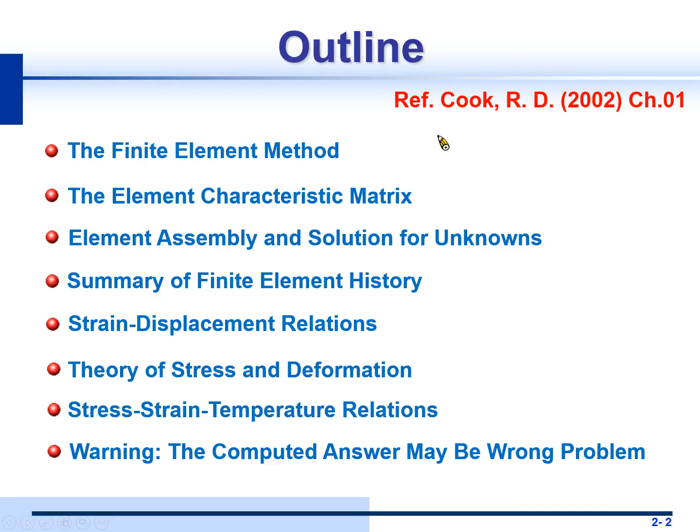So the lecture will introduce the subtopics, and all the subtopics are referenced by Cook RD, chapter 1.

Now we will introduce the finite element method. In this slide, we will show you what is a finite element method. The finite element method is a numerical procedure for analyzing structures and continuous media.

This method can be applied under this condition: when the problem is too complicated to be solved by the analytical solution. Analytical solutions are obtained from journal papers or textbooks.

Because all the analytical approaches have so many assumptions to simplify the problem, the problem after simplification, as compared with real conditions, is sometimes totally different.

So for actual engineering applications, this is not good when using the classical analytical method. Therefore, this is the reason why the finite element method is so important for industry and engineering applications. The problems in engineering, such as structural or stress analysis, heat conduction, or others, several other areas of problems.

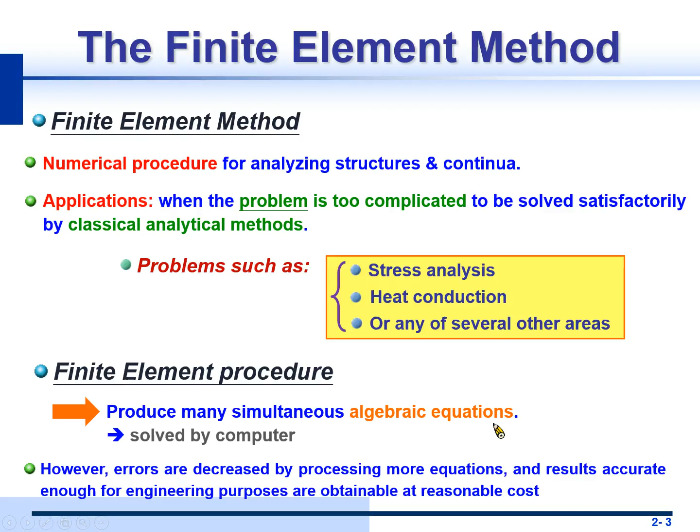Next slide, we'll talk about the origin of the finite element method.

The finite element method is originally dated as a method of stress analysis. So this approach comes from structural analysis.

First, the finite element method is also used to analyze problems such as heat transfer, fluid flow, electrical, and so many other fields.

The application of the finite element procedure includes the design of buildings, electrical motors, heat engines, ships, airframes, and spacecraft. So many industries and applications in life will use this method to calculate the structure or temperature or other concerns of analysis.

So next, I will talk about who will use the finite element method and the software.

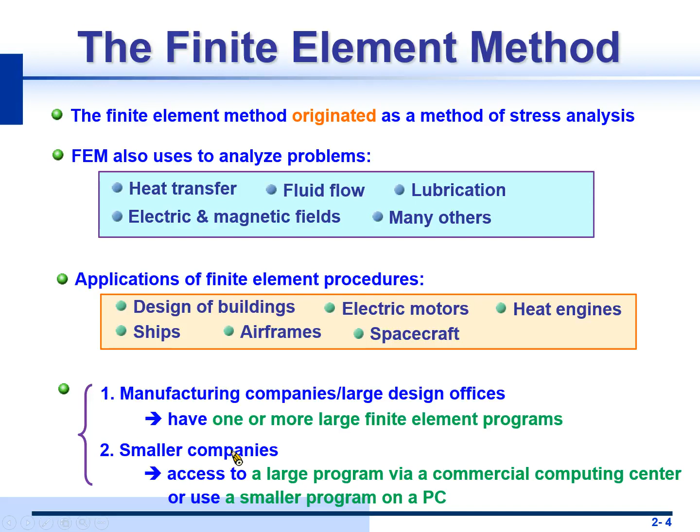OK, if no problem, we will move to the next slide. Next slide, we will talk about the basic finite element concept.

One end of the bar is fixed. The other end is applied by a force P, axial force P. The total length is L. You can imagine the displacement U on the right of the bar after applying the axial force.

So from the viewpoint of the classical approach, we need to write a differential equation for the bar. It means the displacement U is a function of x, and solve it to find U at location x, which is at L_T.

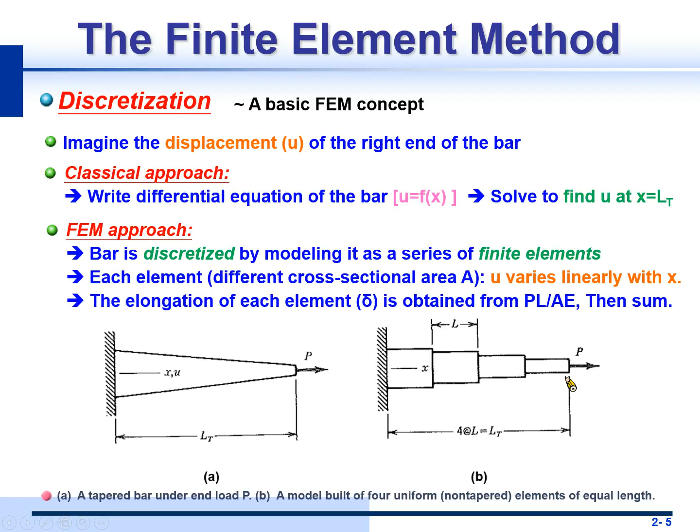If no problem, we will move to the next slide. This slide just shows you the basic finite element concept.

As we talked about in the previous slide, for this example, the accuracy of the solution can be improved as more elements are used, and the finite element models a structure as an assemblage of small parts - it means the elements, and each element has simple geometry.

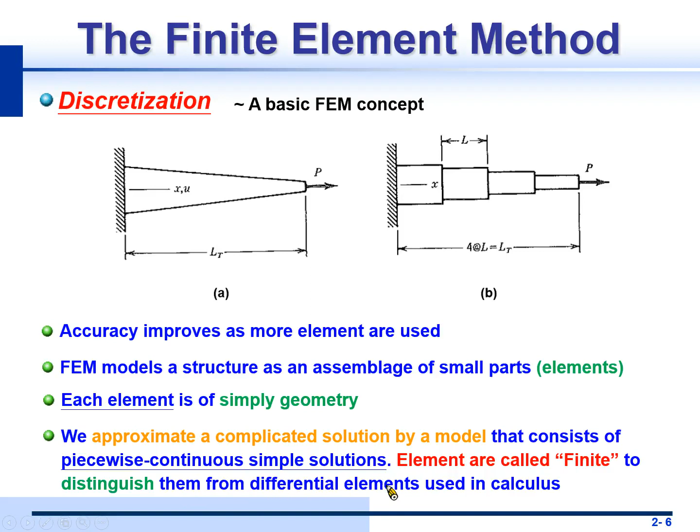And we can approximate a complicated solution by a model that consists of piecewise continuous simple solutions. The elements are called finite because we use numbers of elements, not infinite, to distinguish them from the differential element used in calculus.

Let us move to the next slide.

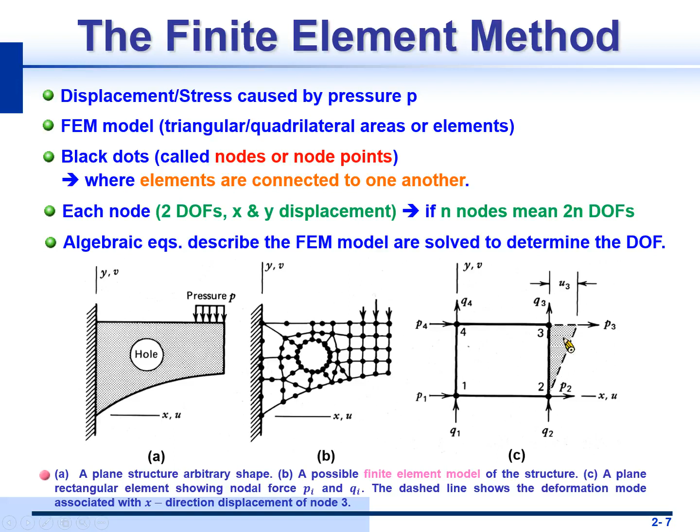This figure follows the previous slide. Let us reference these figures again. From figure A and figure B, you can see the distribution pressure P has converted to concentrated force. Again, the pressure P in the continuous structure becomes concentration force applied at these 3 nodes.

In addition, the elements must be restricted in their deformation pattern. For example, let us reference figure C. Elements are allowed to have only such deformation modes as will keep the edge straight. Adjacent elements will neither overlap nor separate. In other words, if adjacent elements occur in this situation, it means these two elements are separated or have a crack along this edge.

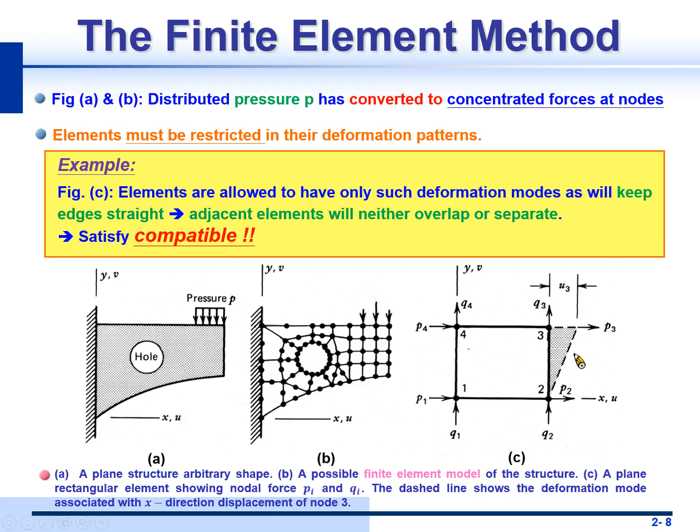Okay, let us move to the next slide.

When we use the finite element model to represent this structure, it typically yields a piecewise smooth phi. Within each element, phi is a smooth function represented by a simple polynomial.

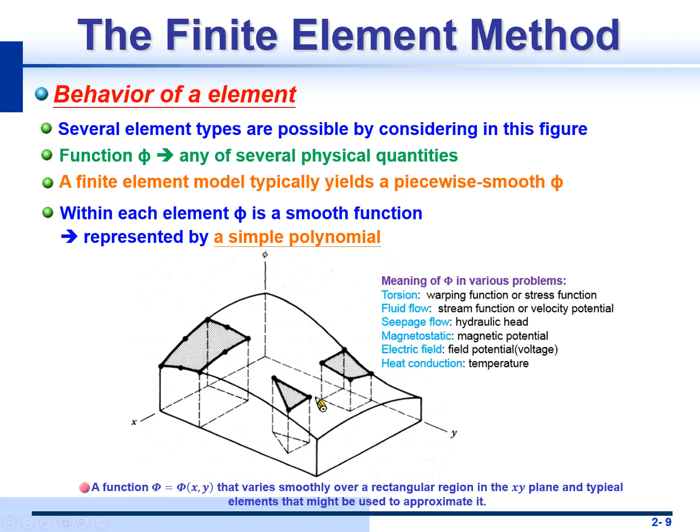I just said that depending on the element type, how we define the polynomial form will be different. The details will be explained later. Okay, let us move to the next slide.

For example, when we consider the triangular element, please reference this figure again. We use the linear polynomial phi equal to a1 plus a2x plus a3y, and the coefficients a1, a2, a3 are constant. What are the variables x and y? x, y is the location of the node. Sorry, for the node.

For the four-node quadrilateral element, we use the bilinear function. This is just one example; we have other definitions for this function. Phi equal to a1 plus a2x plus a3y plus a4xy. It should be noted the 8-node quadrilateral has 8 ai in its polynomial expression. This equation is just for the 4-node element.

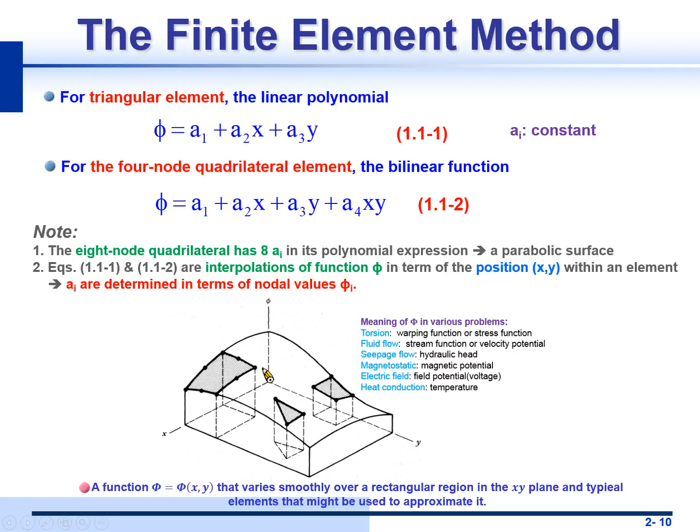We will move to the next slide. How to decide which element to use? The answer is not simple. First, we review again the definition of the finite element method. The finite element method is a method of piecewise approximation in which the approximating function phi is formed by connecting simple functions, each defined over a small region.

Here is the element: a finite element is a region in space in which a function phi is interpolated from nodal values of phi on the boundary of the region in such a way that the inter-element continuity of phi tends to be maintained in the assembled region. So the definition is very important. Combining this concept and the previous slide, I believe you know the basic concept of the finite element.

Following, I will list the steps of the finite element analysis. First, we need to divide the continuous structure into finite elements. Then formulate the properties of each element; it means we need to care about the conditions that allow deformation or temperature. Then assemble the elements to obtain the finite element model of the structure. This is from the viewpoint of structural analysis. And then apply the known loading.

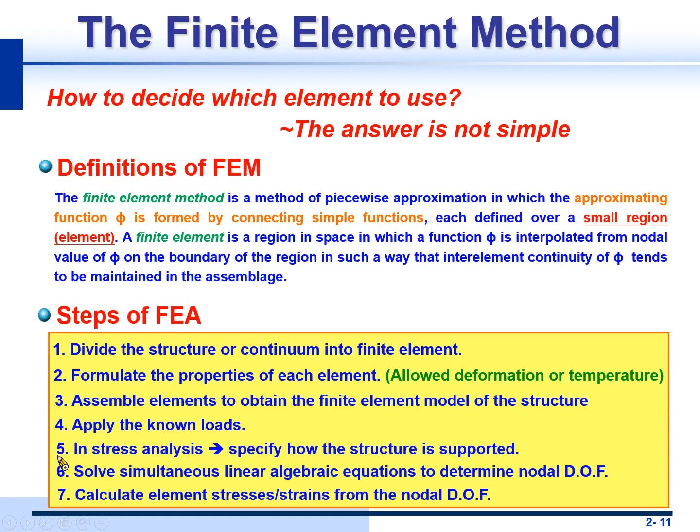This slide just shows you some example applications. This example is an axisymmetric rocket nozzle. The left side is the detailed structure of the rocket nozzle, and the right side is the possible mesh model. You can see that each element has a node at each vertex, and the stresses caused by the temperature gradient and the internal pressure are desired.

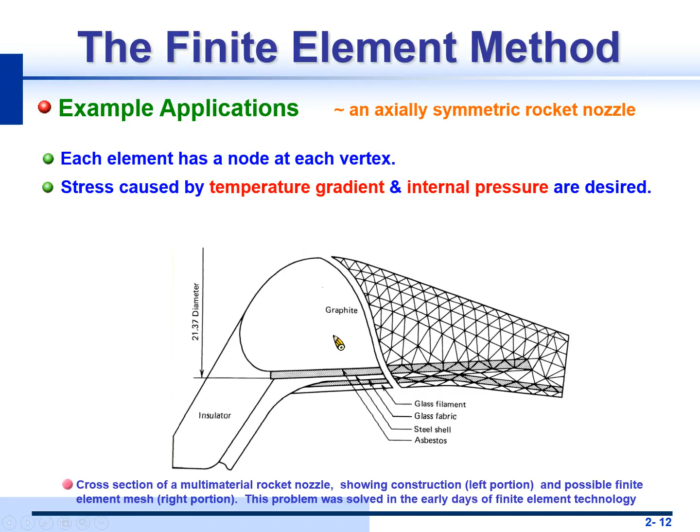The temperature gradient comes from the heat transfer analysis and needs to be input to the structural finite element analysis. And we will apply the internal pressure around the inner surface of the rocket nozzle. So if you want to get an accurate result, you need to carefully handle the boundary conditions and how to apply the loading based on the actual situation of the problem. This is very important when you handle such a problem.

Okay, in this example is an arch dam. You can reference this figure. When modeling the arch dam, we select 3 kinds of elements.

The first is the quadrilateral element, the second is the triangular element, and the third is the single cubic element. And you can find that in each kind of the finite element modeling, the elements that we talk about are different based on the location of the node.

So when you see the model, the first model uses the quadrilateral element. The element is based on the isoparametric solid element, and based on the loading condition, the stress is induced by the hydrostatic and the gravity loading.

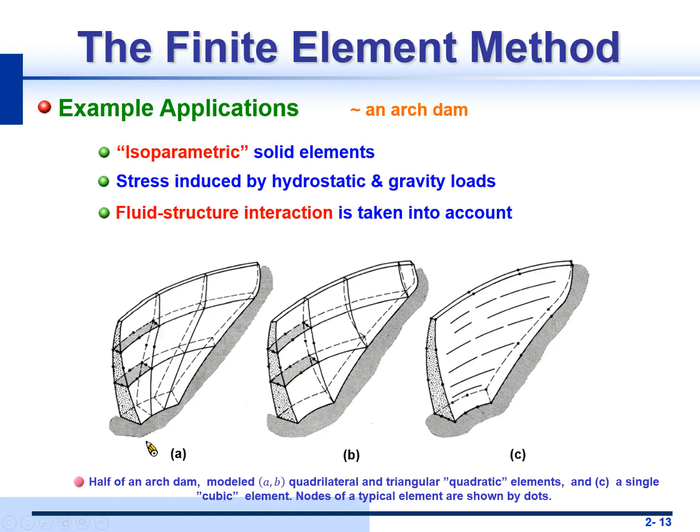Let us move to the next slide. Okay, in this example, we talk about the structural mechanics problem. In this case, it is the plate-bending element applied to an automobile frame. This figure shows the finite element model for this automobile frame. The detailed model is shown here.

It is used to find deformation, stress, natural frequency, and mode shape. So this finite element model is for the vibration analysis of the structure. We care about the deformation and the stress induced at the natural frequency. This is really important because the driver or people in the car need to feel comfortable, and we need to consider the structure and the stress of the car.

So this just gives you an example, and these three finite element contours from the left side to the right side are the bearing housing model, the deformed model, and the stress contour of the bearing housing. So this is easy to understand.

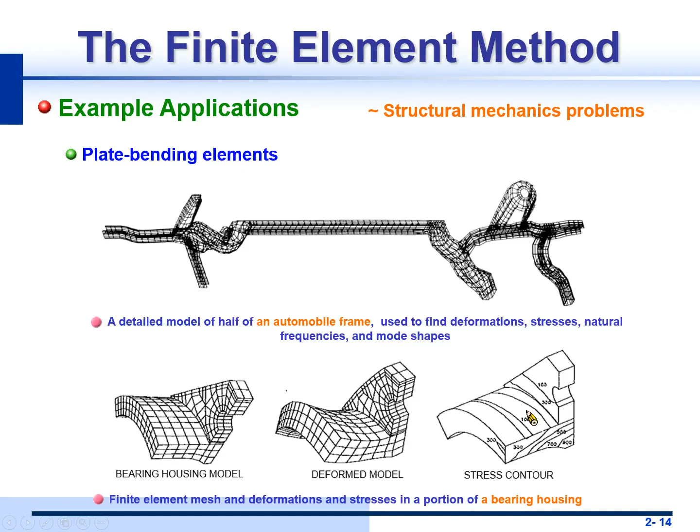Next slide talks about the element characteristic matrix. When we talk about the element characteristic matrix, we call it the stiffness matrix or conductivity matrix. When we perform the structural analysis, the matrix is the stiffness matrix. But when we perform the heat transfer analysis, we call it the conductivity matrix, based on the problem you

prefer. In addition, we have three ways to derive an element characteristic matrix. The first is the direct method. The direct method is limited to very simple elements, based on physical reasoning.

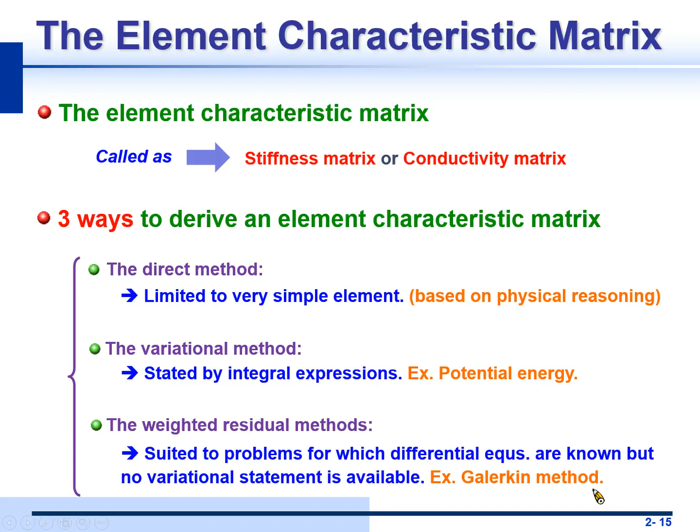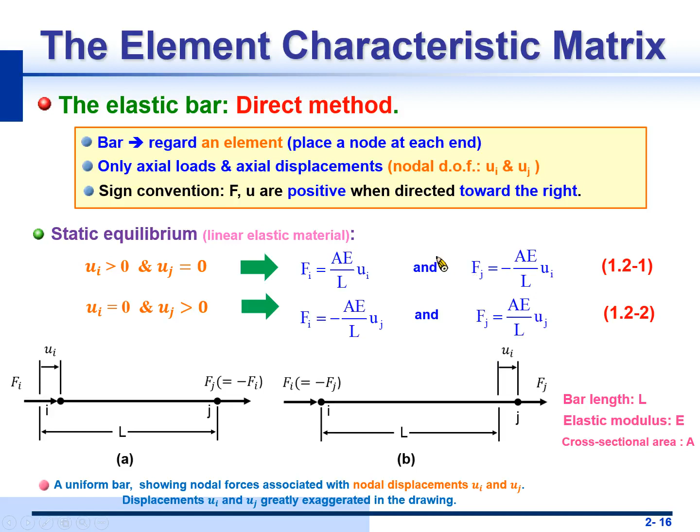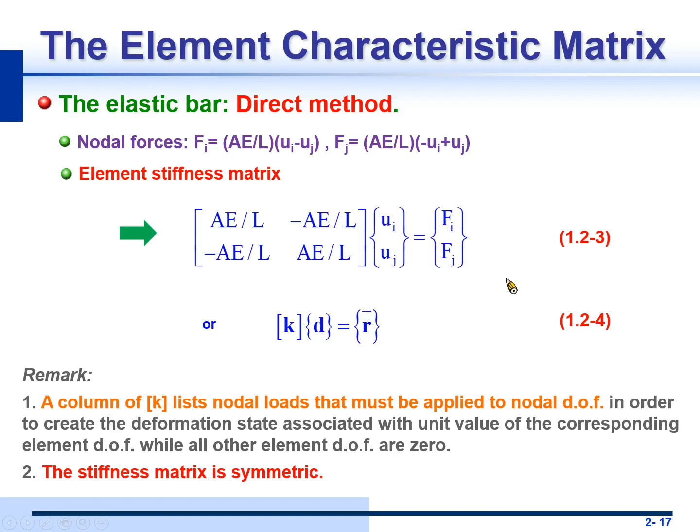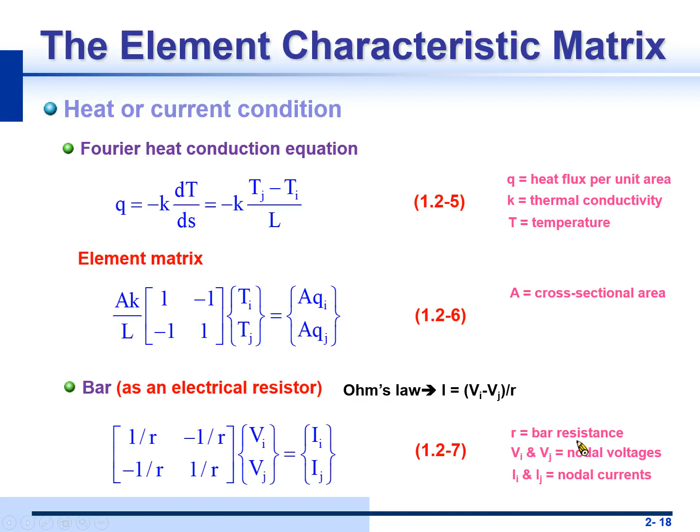Okay. If we consider another application, the electrical resistor, we can get this kind of element matrix. It should be noted that it is based on Ohm's law. The current I is equal to the voltage difference over R. The R is the bar resistance. So we can do it this way. Similarly, if no problem, we will move to the next slide.

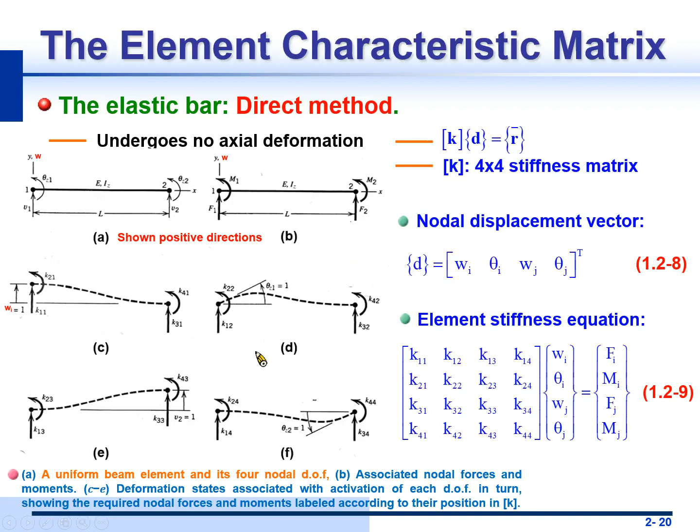Okay, now I will talk about it in Chinese.

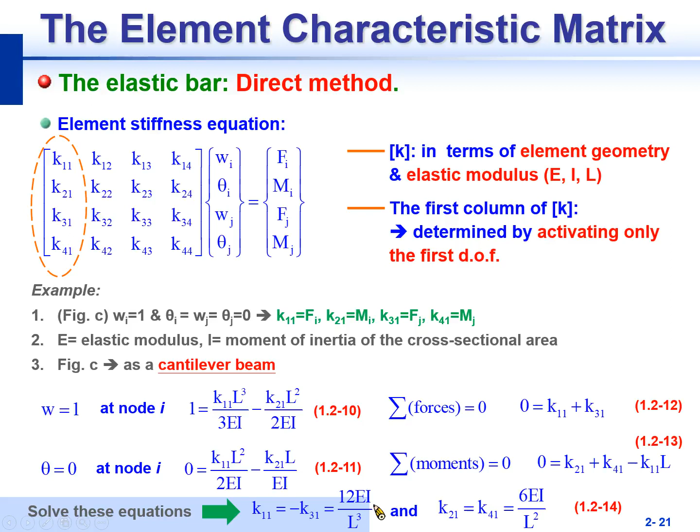applied here, toward the left direction. If we define the positive direction as toward the right, the P is applied in the negative direction, right? So if we mesh the structure as a finite element model with two elements, after modeling, the finite element model is shown here. The model is meshed by beam elements, and we have two elements here.

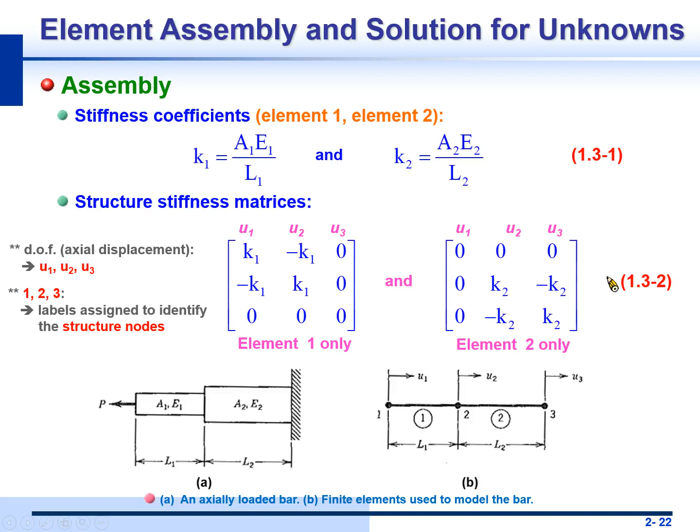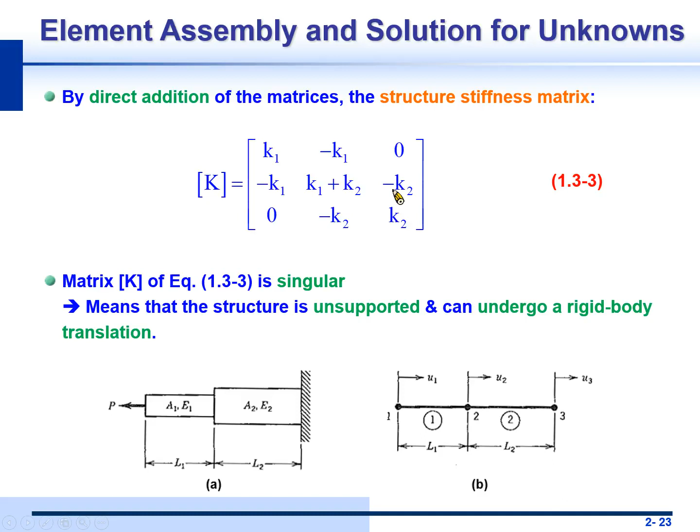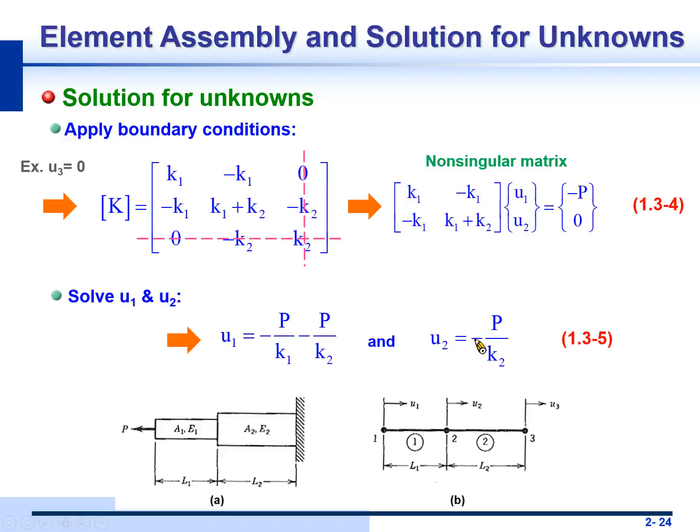Once we get the nodal displacement, we're interested in the stress and strain of this bar. Now we will explain how to get the stress and strain for element 1 and element 2 based on the structure, with the form of the cantilever beam.

Based on Hooke's law, sigma 1 equals E1 epsilon 1. The epsilon means the strain, right? So this is based on Hooke's law, we can get the stress-strain relation.

What is the strain? Based on the definition, it's delta u, where delta u means the displacement. So strain means u2 minus u1 over the original length of the element. Finally you can get this result.

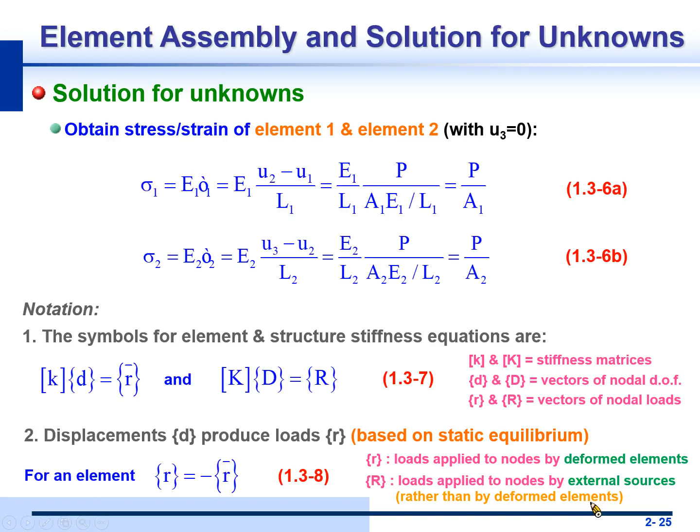He studied the Saint-Venant torsion problem by the principle of stationary potential energy and piecewise polynomial interpolation of the triangular subregion.

Then the finite element method had a major advance as the PC and programming languages developed. I am not going through the detail, but later Clough created the name finite element method.

It was recognized as having a sound mathematical foundation, as the solution of the variational problem by minimization of a functional.

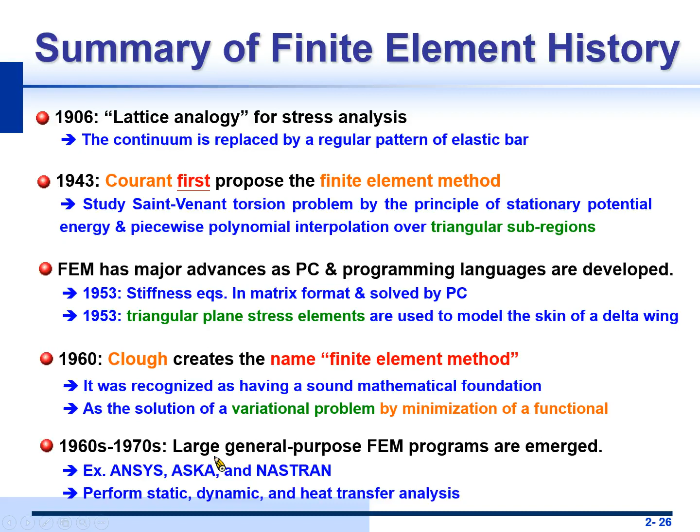It should be noted that regarding papers, journal papers or conference papers on FEM published in 1961, there were only 10 papers. In 1971, this number grew, but in 1986, wow, the total number became huge, right?

Now I cannot count the number because everywhere has finite element and related papers and reports. So this is a summary of the finite element history. Next, if no problem, we will move to the next slide.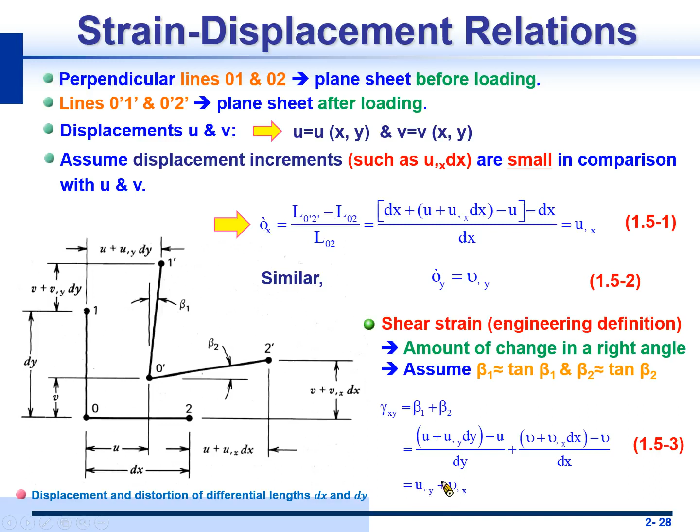So gamma xy, meaning the engineering shear strain, equal to beta 1 plus beta 2. It should be noted that we assume beta 1 almost equal to tangent beta 1, beta 2 is almost equal to tangent beta 2. So finally, we can get this result. Gamma xy equal to partial u partial y plus partial v partial x.

So for the 2D strain and displacement relation, finally you can get this equation, but some errors here, some error of the symbol here. This one is epsilon x. Epsilon x equal to partial u partial x. Epsilon y equal to partial v partial y. And the shear strain gamma xy is equal to partial u partial y plus partial v partial x. But

Moreover, when we consider three-dimensional strain and displacement relation, we need to consider the variable z, right? And the displacement along z direction, w. So we get another three equations. Epsilon z is equal to partial w partial z, and gamma yz is partial v partial z plus partial w partial y, and gamma zx equal to partial u partial z plus partial w partial x.

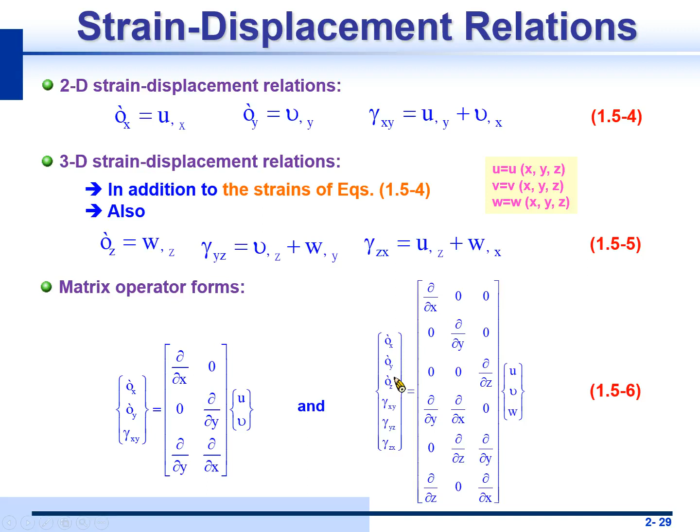If no problem, we will move to the next slide to talk about the plane beam, the special case. When we talk about the plane beam case, please reference this figure. The left side of figure A is the differential slice of the beam that lies along the x-axis. It means we consider a beam in the xz plane. We just consider the very small increment dx along the x direction.

Okay, and based on the standard beam theory, the transverse shear deformation can be ignored. So all the deformation and strain are expressed in terms of the lateral displacement W. The partial W over partial x is assumed to be small. If very small, it means that this point and this value should be identical to the tangent theta, right?

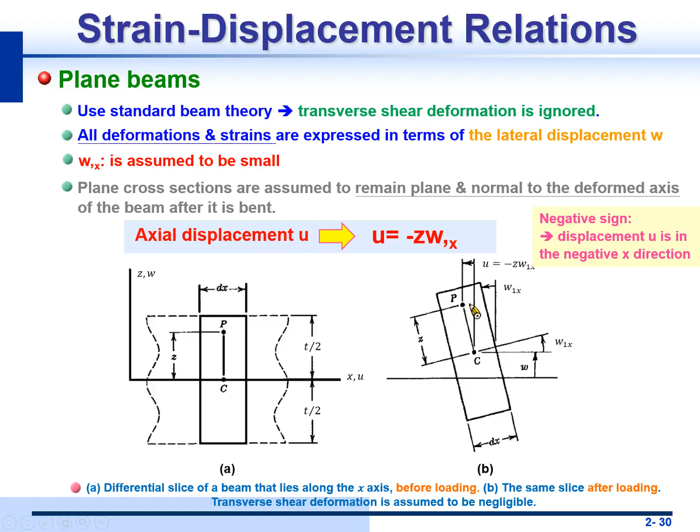Actually, epsilon x, sorry, there's some error here. If epsilon x equals u comma x, so you can get this, and U is equal to this value, this equation, right? So combine these two, we can get this: epsilon x equals minus z w comma double x, right?

W comma double x means the curvature of the beam. We have some notation here. Let us...

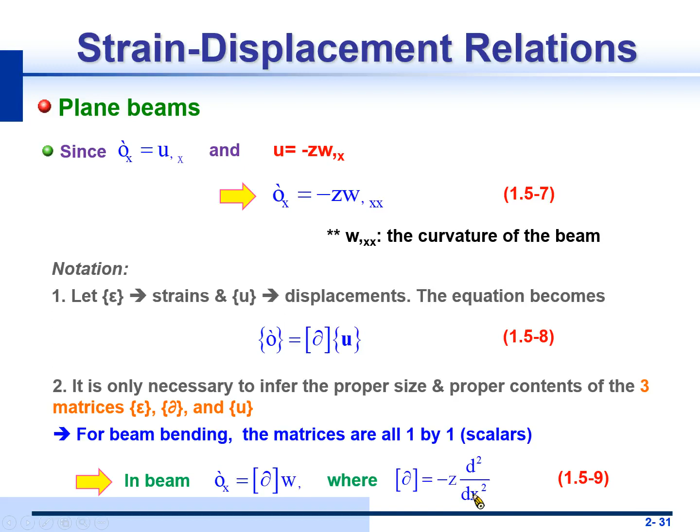Okay, if no problem, let us move to the next slide, to talk about the theory of the stress and the deformation.

Actually, this part can be explained in detail in the elasticity theory. The elasticity theory states the conditions that must be met by an exact solution. Please consider this figure. When we talk about this, first we need to consider the stress equilibrium. Please reference figure A, the unit of the stress.

At this moment, we consider the body force of this material. For example, we have the differential force Fx multiplied by the differential volume. The differential volume dV means dx dy, the area, times the thickness T. Okay, so this is the detailed equation.

And the stress and the body force are functions of the coordinate, right? Now we define the coordinate along the plane as the xy plane. So sigma x comma x is the rate of change of sigma x with respect to x. The sigma x comma x dx is the amount of change of sigma x over the distance dx. I think this is no problem for students who have studied mechanics.

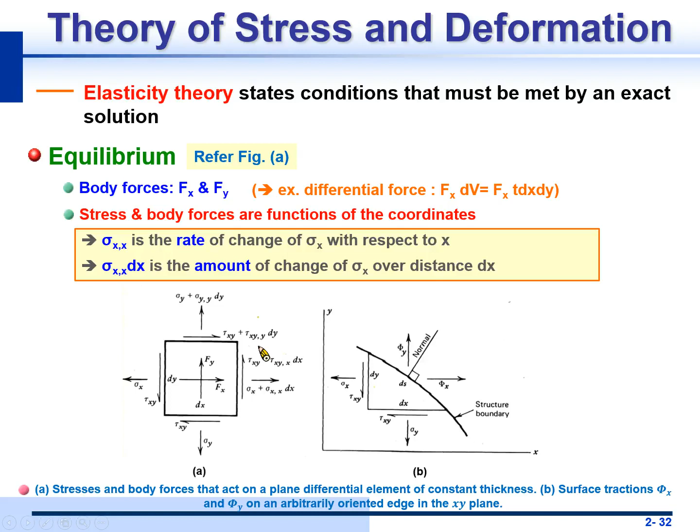Okay, next we will consider the free body diagram and express the force equilibrium. So based on the summation Fx equal to 0, that is, in the x direction we must maintain static equilibrium, the resultant force must be zero.

So based on this concept, we can list this equation here. The details I will not go through. If you have any problem, you can ask a classmate, me, or the assistant.

And similarly, a procedure can be achieved by the summation Fy equal to 0. So based on these two equations, finally we can get these two equilibrium equations here, one along the x direction, another along the y direction.

It should be noted that in this equation we still consider the body force, Fx and Fy. But the effect of the body force is usually very small compared with the loading effect.

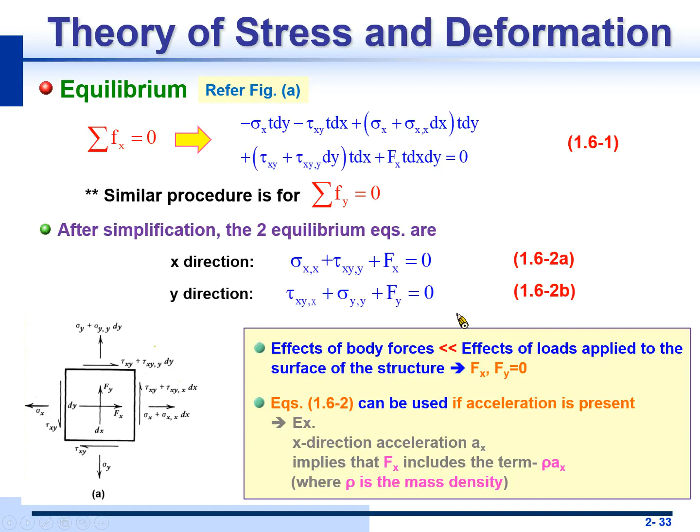If no problem, we will move to the next slide. Now we will talk about the compatibility. The compatibility is related to the stress and the strain, and the compatibility condition is that the displacement field is continuous and single-valued. It means we need to satisfy this equation.

Epsilon x comma yy plus epsilon y comma xx equal to gamma xy comma xy. The compatibility relation exists among the strains if a plane displacement field is compatible. Most finite element methods are based on displacement rather than stress, and the compatibility equation is automatically satisfied, as one may see by substituting this equation into it. For 2D, the strain and displacement relation, there are some errors here, so you need to correct them in your handout.

Epsilon x equal to partial u partial x, epsilon y equal to partial v partial y, and gamma xy equal to partial u partial y plus partial v partial x. Now we will use Chinese.

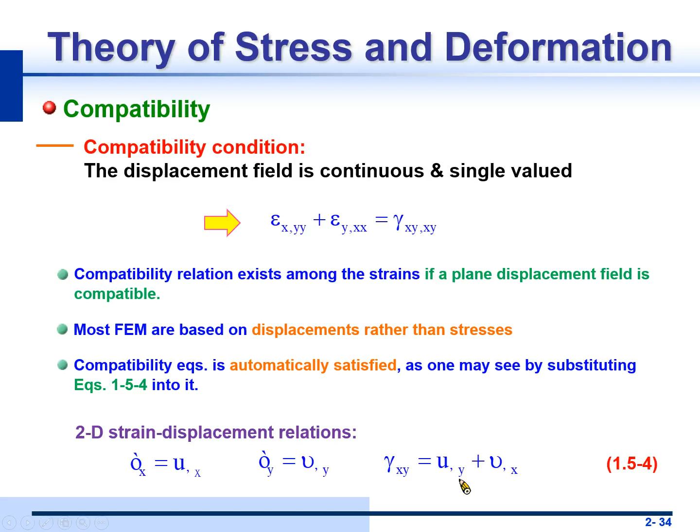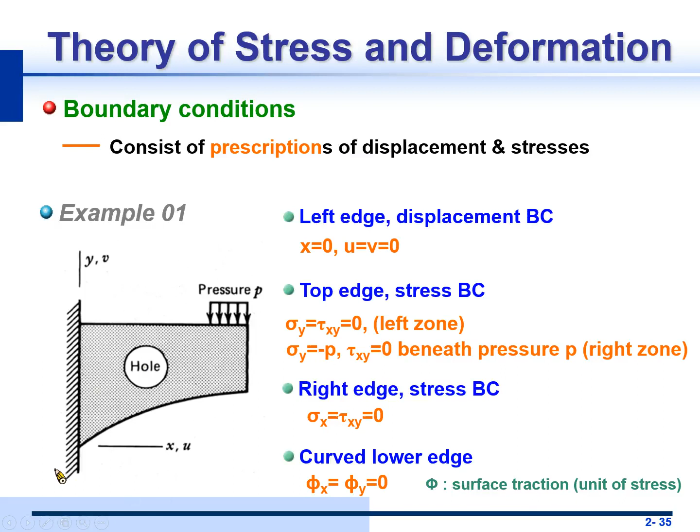Next, we consider the right edge. How to consider the stress boundary condition? This edge is stress-free, right? So sigma x equal to tau xy equal to 0. And how about the curved lower edge? We do not have any surface traction here. For surface traction, notice its unit: the unit is stress. So at this edge, phi x equal to phi y equal to 0. Phi x and phi y mean the components of the surface traction here. If no problem, let us move to the next slide.

Now we consider the boundary condition again. This slide shows you how to get the force equivalent equation from the boundary. Consider this figure. This figure is the stress unit close to the boundary, and in this figure we have two surface traction components, phi x and phi y, the x and y direction force increments. It should be noticed that their unit is stress, not force.

It should be noted that the Φx and Φy traction components have units of stress, not force. So the stresses are the x and y direction force increments divided by the boundary area increment dA on which they act. The area increment dA is equal to thickness t multiplied by surface length ds. Based on this relation, we can introduce the equilibrium of the x and y directional forces and get these two equations.

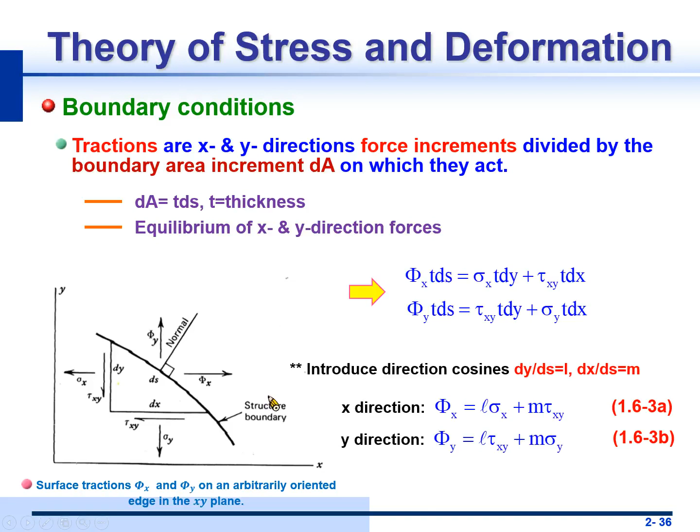And then delete t in each item and introduce the direction cosines: dy over ds equal to l, dx over ds equal to m. We define the new items l and m as the direction cosines. Finally, we can get these two equations. Okay, if no problem, we will move to the next slide.

In the previous slide, when we talked about the surface traction, it was based on the 2D condition, but when we expand to the 3D case, the surface traction equations have an additional equation here. So in total for the 3D case, we have 3 surface traction equations and 3 equilibrium equations. Consider these equations and the linear elastic body. If the stress or displacement field satisfies, one, the equilibrium equations, two, the compatibility equations, which should be automatically satisfied, and three, the boundary conditions.

These equations belong to equilibrium and the boundary condition equations, right? So based on these formulas, we can find a unique and exact solution for our concerned problem. On the other hand, for the finite element method, we need to choose a suitable displacement field, provide compatibility between the elements, and satisfy the displacement boundary conditions. Therefore, the exact solution is achieved in the limit of an infinitely refined mesh. I think this is very easy to understand, so I will move to the next slide.

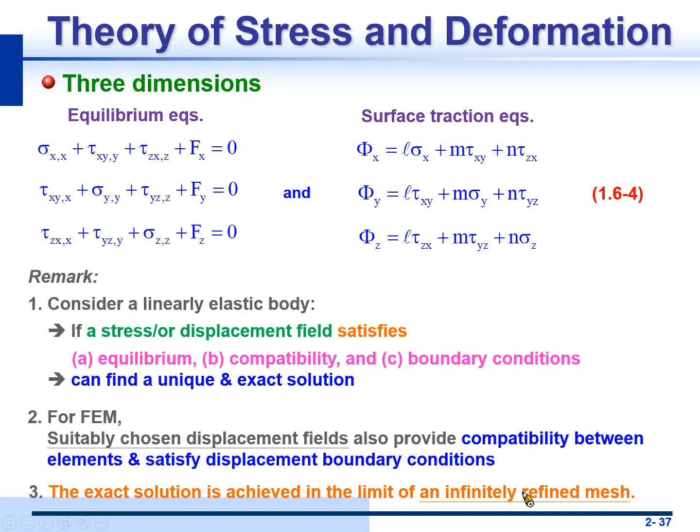The next slide talks about some of the symbols here. In general, for the stress vector we have 3 normal stresses and 3 shear stresses. For the strain vector, the strain epsilon has 3 normal strain items and 3 shear strain items. The first 3 are epsilon x, epsilon y, epsilon z. Please reference your handout, okay?

And for the isothermal stress-strain relation, we can get this item. Sorry, this is the epsilon symbol. Epsilon equals the compliance matrix, in Chinese 柔度矩阵, times sigma, which can also be expressed in another form: the sigma vector equals the stiffness matrix times the epsilon vector. The inverse of the stiffness matrix becomes the compliance matrix.

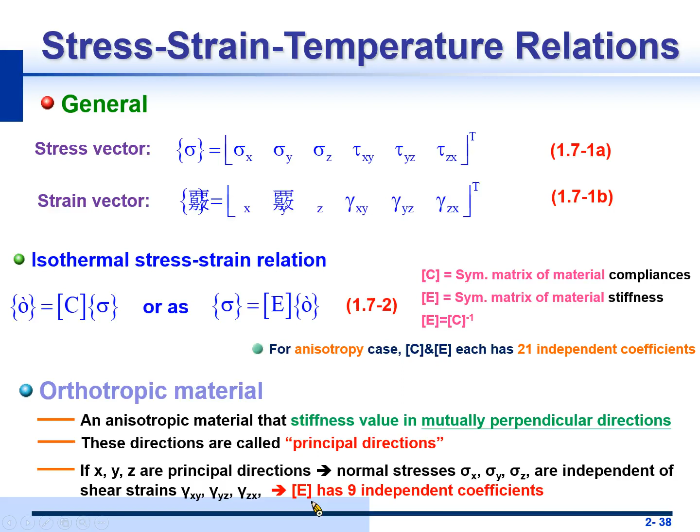For an anisotropic case, these two matrices each have 21 independent coefficients. I will show you the detail later, but all the detail is explained in the elasticity course. Orthotropic material: what is an orthotropic material? An orthotropic material has stiffness values in mutually normal directions, and these directions are called principal directions. If x, y, z are the principal directions, the normal stresses σx, σy, σz are independent of the shear strains γxy, γyz, and γzx. At this moment, the stiffness matrix E has 9 independent coefficients, reduced from 21 to 9.

The following several slides will be in Chinese, because for the detail, some of you can reference the elasticity textbook if you are interested. But I will summarize the material properties for this item. Now I will use Chinese to explain the several slides.

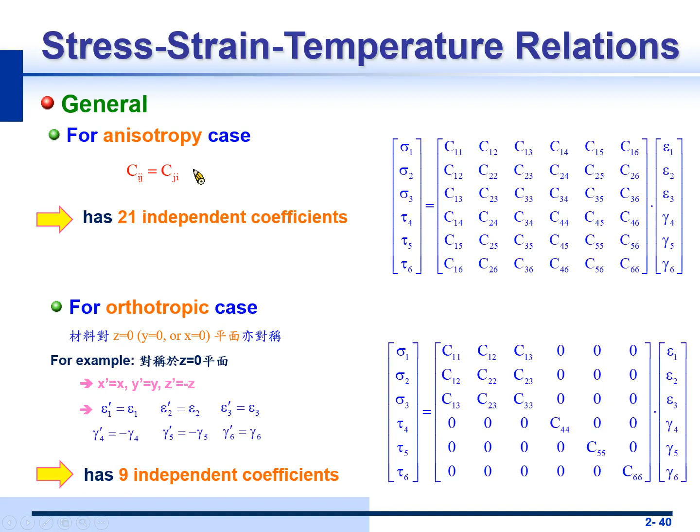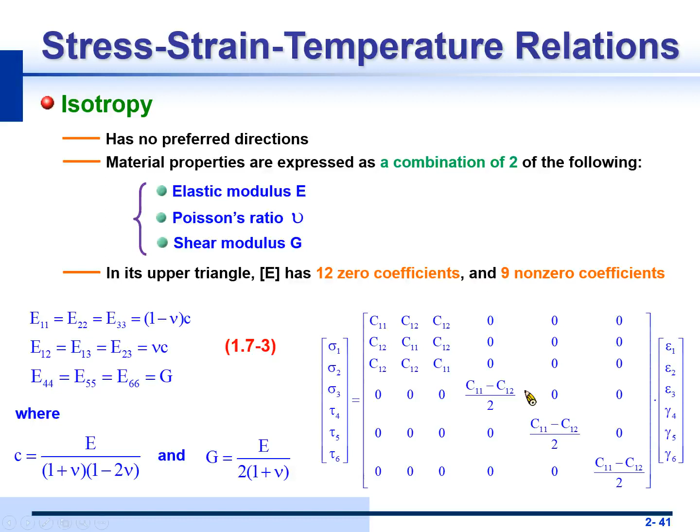Okay, if no problem, now we will consider some special cases for plane strain or plane stress. We consider the plane strain condition. What is the plane strain condition? It means the out-of-plane displacement is equal to 0. So, in other words, for plane strain, the strain in the out-of-plane direction should be 0, including the normal strain and shear strain related to the z direction.

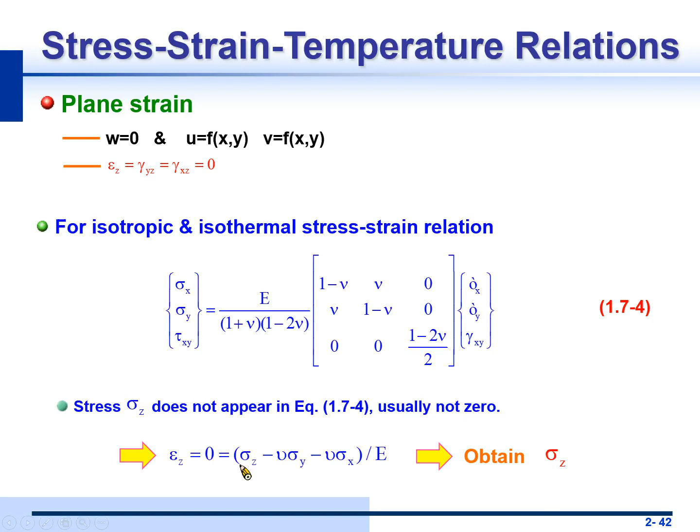So based on this concept, for the isotropic and isothermal stress and strain relation, the matrix form can be expressed like this. Okay, sorry, some simple error here. This one should be epsilon x. This one should be epsilon y. In this equation, we cannot find sigma z, right? But that does not mean sigma z is 0. The stress sigma z usually is not 0, and we can obtain sigma z from this equation. Okay. If no problem, we will move to the next slide.

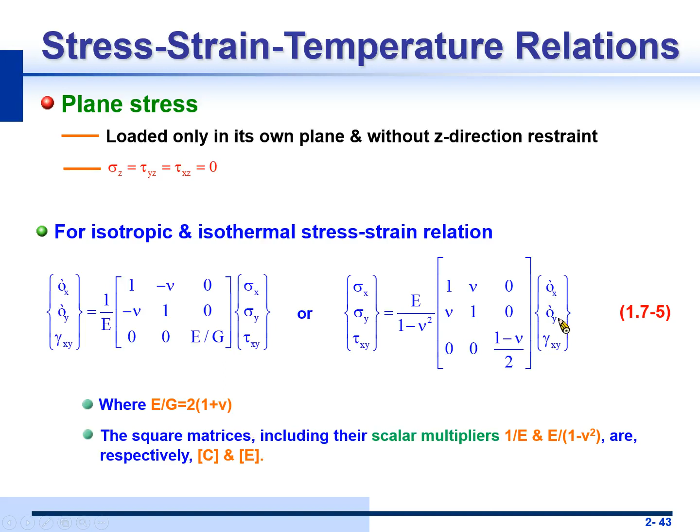Now we consider the condition of beam bending. First, we consider the beam suffers a uniaxial stress. Sigma x equals Young's modulus multiplied by epsilon x. And from the previous slide, we have demonstrated that epsilon x shall be equal to minus z times the displacement w double prime x. Combining these two, we can get the relation between the stress and the displacement. Okay.

Now we want to find the bending moment M. So based on the fundamental definition, M shall be equal to the integral of sigma x multiplied by z dA. Sigma x dA is the force, right? Force multiplied by z becomes moment. So we integrate from minus t over 2 to positive t over 2, meaning the total thickness of the beam is t. Finishing this integral, we can get this item.

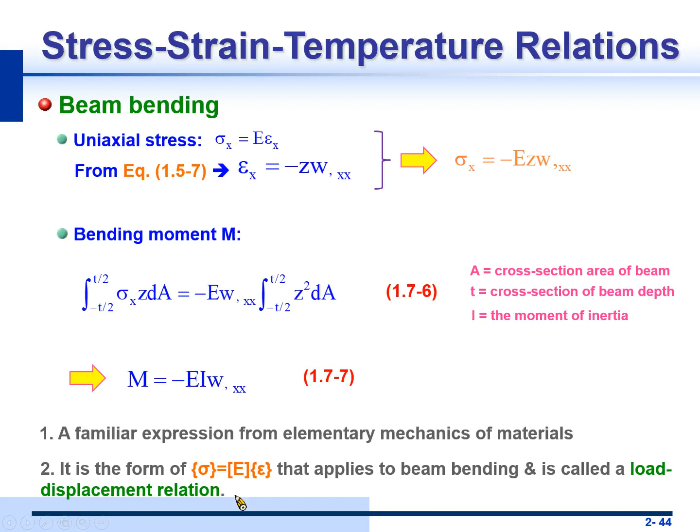And it is the form of the sigma vector equal to E matrix multiplied by the strain vector. Let's apply it to beam bending, and it's called a load-displacement relation. Okay, I think this slide is very simple, so I will move to the next slide.

Okay, now we will talk about initial stress and strain and the thermal effect. The term initial stress means a stress present before deformation. It means there is initially strain within the structure. In other words, it also means the residual stress. So by the formula, this equation can be expressed this way: sigma, the stress, equals the elastic matrix multiplied by the total strain minus the initial strain.

Sorry, there is a simple error here. Please reference your handout. This item means the total strain minus the initial strain, because the external force will induce the elastic strain directly, linearly, if the material is a linear material. So we need to subtract the initial strain first, and this item contributes the elastic stress, and this item is the initial stress. So summing the elastic item and the initial stress item, we get the final stress here.

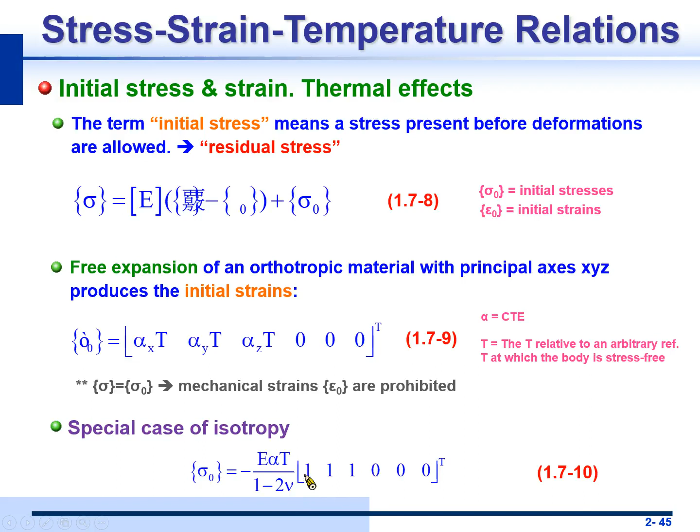And then, for the special case of the plane stress condition, the initial strain epsilon 0 can be expressed this way, and the corresponding stress is shown here. In addition, for the plane strain condition, the initial strain epsilon 0 is shown here, and the corresponding stress is shown here. Okay.

By definition, alpha is equal to partial epsilon over partial T. This equation is workable when the deformation is unconstrained, and only when alpha is independent of T.

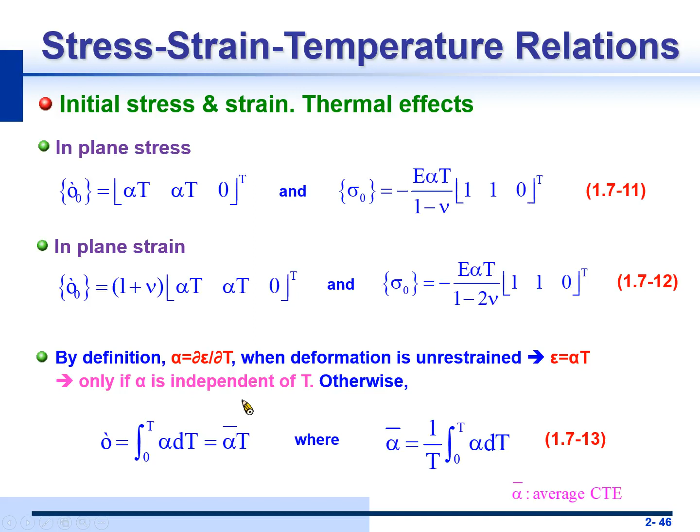This slide just shows you some remarks. First, Poisson's ratio nu is a little affected by temperature. The modulus E is affected more. For stainless steel, Young's elastic modulus decreases about 20% as temperature rises from 0 degrees C to 450 degrees C. Second, the elasticity properties are almost independent of the stress. Okay, this is very important.

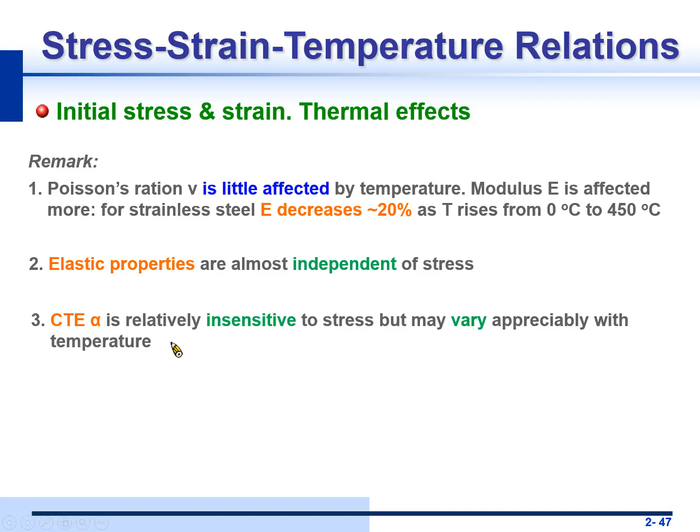The third remark: the CTE alpha is insensitive to stress but may vary with temperature. So we need to care about the Young's modulus and the CTE characteristics of our concerned material when we want to input such a material model in the finite element analysis. Okay, let us move to this topic.

The topic is: warning, computed answers may be wrong. When we perform finite element analysis, we may overlook or misjudge important aspects of physical behavior. There may be an error in the computer program. Some computational path has never before been exercised or checked.

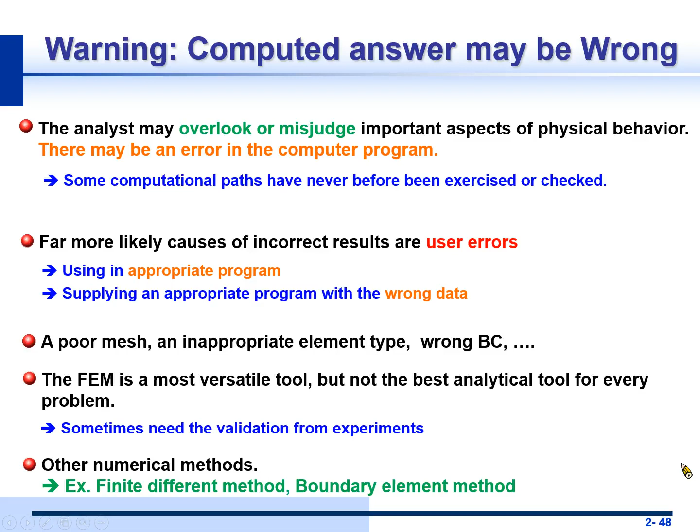In addition to the finite element method, other numerical methods such as the finite difference method and boundary element method can be used for special conditions of the problem. Okay, I think this slide is very important because a powerful computer program cannot be used without checking. Its results cannot be trusted if the user has no knowledge of its internal workings or little understanding of the physical theory on which it is based. An error caused by misunderstanding or oversight is not correctable by mesh refinement or by using a more powerful computer.